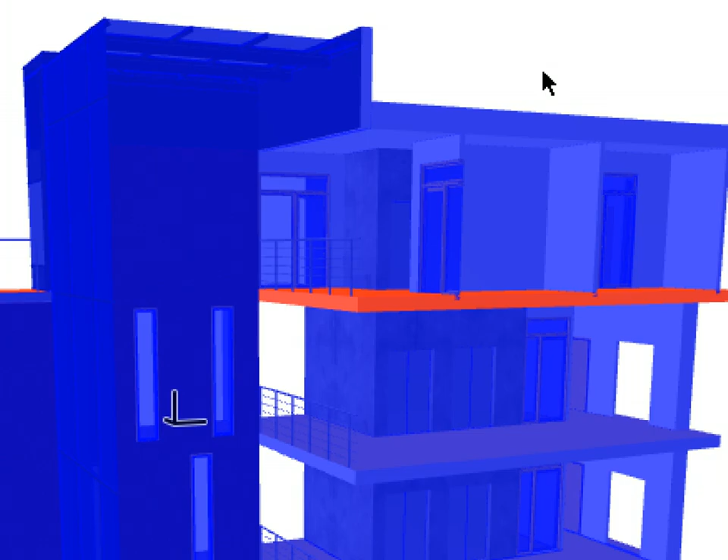Step 3. Requesting and granting elements. In this step, we will become familiar with more advanced teamwork messaging options, including element requests, as well as assigning or granting elements to other team members.

We will also see how these smart messages can help your everyday design work by automatically focusing on the element in question. In this step, the design team will be creating and modifying slab edges and working on the galleries and suspended ceilings of the office building.

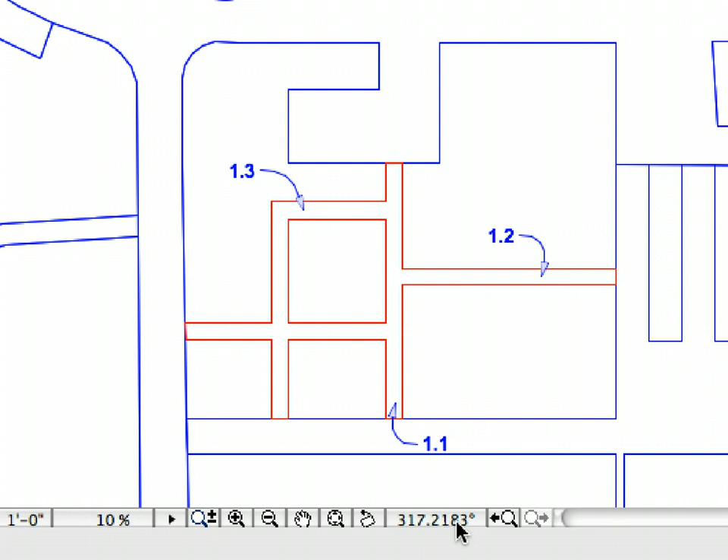Switch to the ArchiCAD instance of Mary Jones. Click the Reset Orientation button to reset the orientation of the floor plan view. Double-click to activate the 4.3.1 Requesting Slabs preset view in the Chapter 4 folder of the Navigator view map. The 3D window will open.

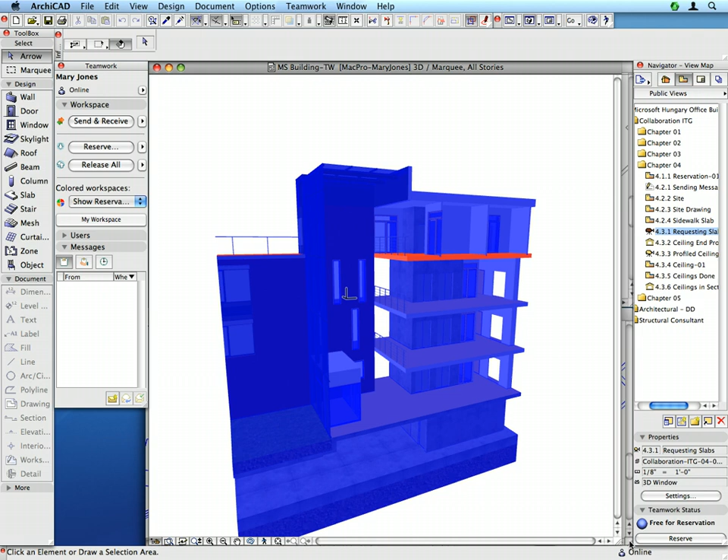The 3D window also shows reservations by other team members. You can see that the slab above the third floor is currently reserved by Joe Smith. Switch to the All with Original Color option in the Colored Workspaces field of the Teamwork palette.

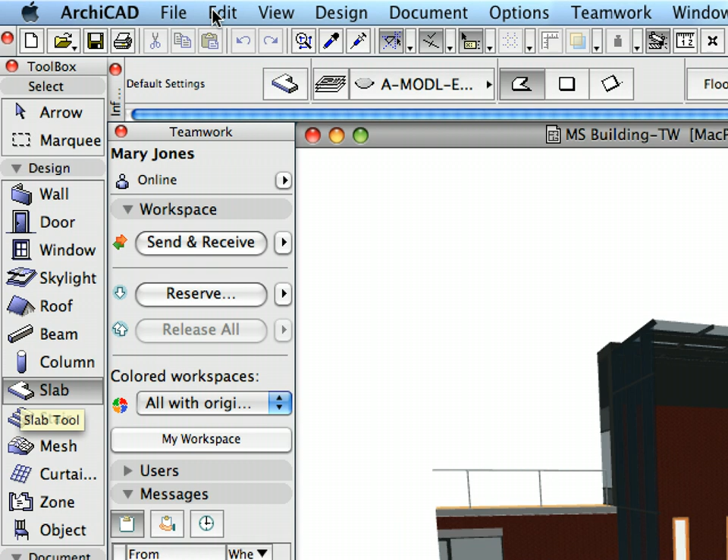Click to activate the Slab tool in the toolbox. Select Edit, Select All Slabs, to select all the slabs in the project. Click the Reserve button on the Teamwork palette to reserve the selected slabs. The Last Reservation Results dialog appears.

Here you can see that the BIM server could not reserve all requested elements. The Reserved column displays the number of successfully reserved elements. The Conflict with Others column displays the number of elements that could not be reserved because they are already reserved by someone else. As you can see, there was one element that could not be reserved due to conflict.

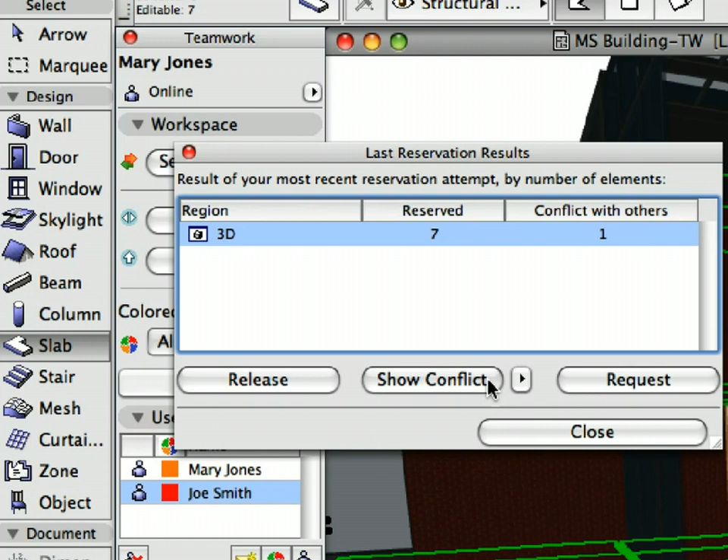Highlight the 3D region row. Notice the Show Conflict and Request buttons are enabled when conflicting elements are found. Click the Show Conflict button. This will take you to the 3D view of the whole model, where the conflicting element has been selected for you. This is the element we could not reserve because it is already reserved by Joe Smith.

Click the Request button in the Last Reservation Results dialog. The Ownership Request dialog is displayed. Here we can write an instant message to the owner of the element or elements. Notice that ArchiCAD automatically fills out the To field and inserts a default message text which you can freely change if you wish. You can also set the message priority as we discussed earlier. Click the Request button to send the request message to Joe Smith.

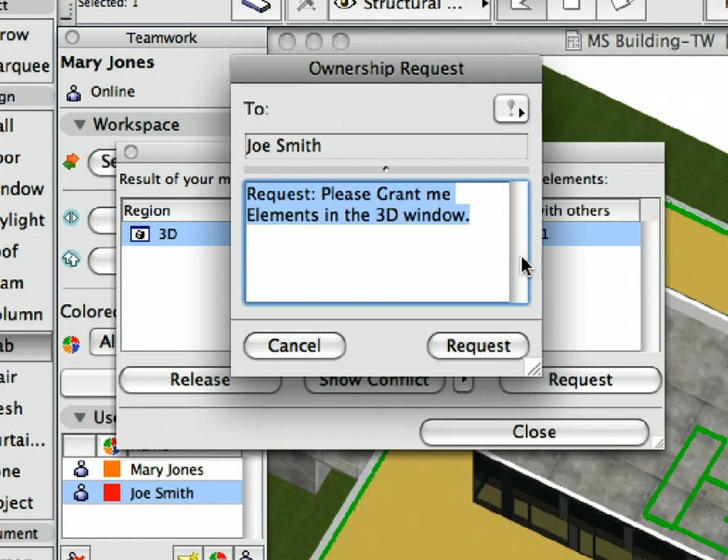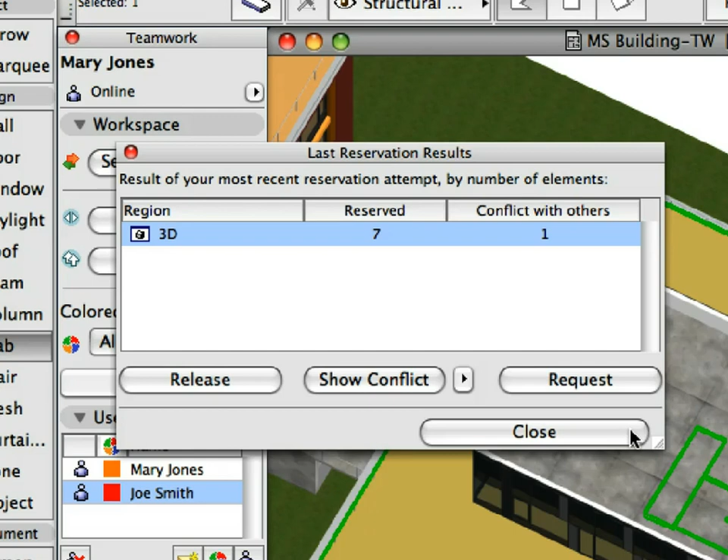It is important to know that ArchiCAD automatically associates such request messages with the requested element or elements, so the other team member can easily view the requested elements on the floor plan or in 3D, and even release these with a simple click. Click Close to leave this dialog.

Switch to the ArchiCAD instance of Joe Smith. Switch to the To Do category and double-click to open the message that has just been received to view its content. The Ownership Request dialog opens. Here you can not only read the message, but also perform various follow-up actions with just the click of a mouse. Let's review the possibilities.

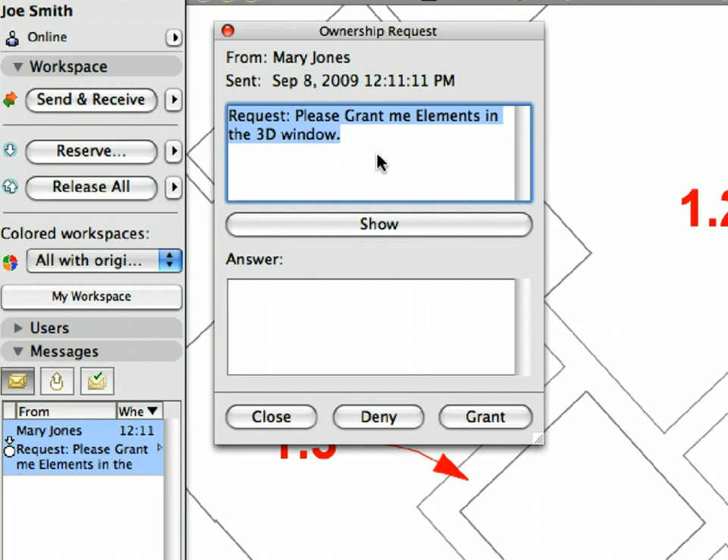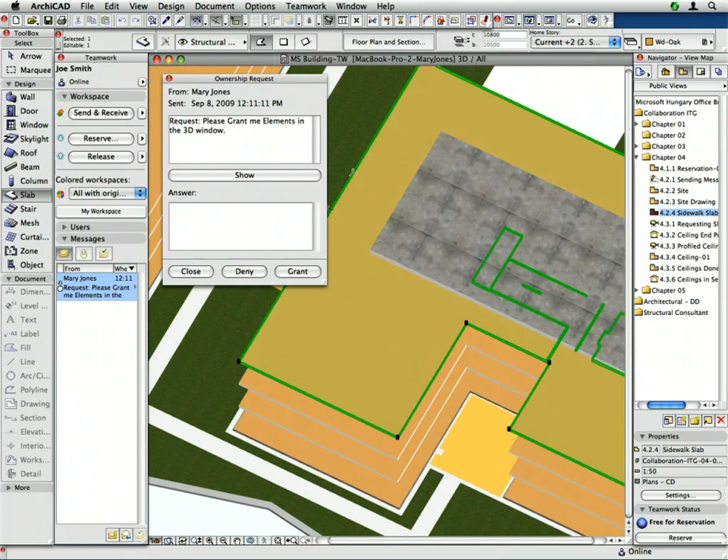Click the Show button in this dialog to display the requested element. The 3D view opens with the requested slab automatically selected. Now we can easily make a decision whether to grant or deny the requested element, or close the dialog if we want to handle this request later. Click the Grant button.

The element is granted to Mary Jones. The hotspots of the slab immediately show that it no longer belongs to Joe Smith. A grant message is also sent to Mary Jones automatically. Once we grant or deny an ownership request, its message will be automatically moved to the completed folder.

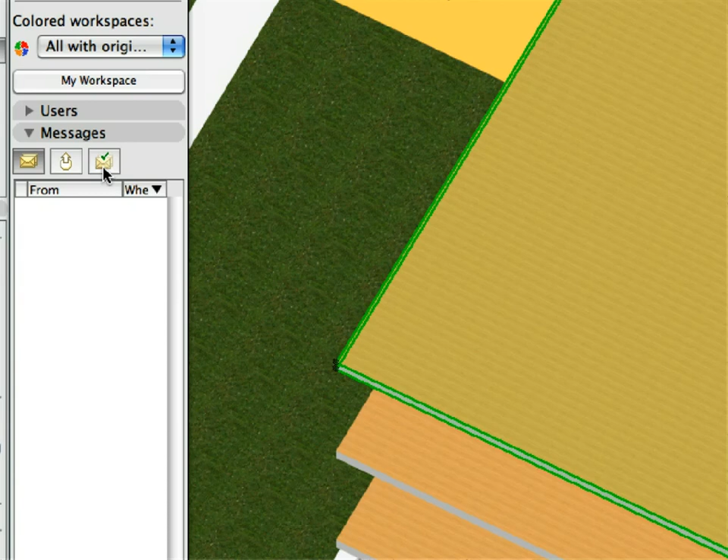Switch to the ArchiCAD instance of Mary Jones. Check the To Do category of the Messages panel of the Teamwork palette. The new message shows that Joe Smith granted the requested slab. It is also visible that the selection hotspots of the selected slab have changed. It's already in Mary's workspace. Double-click the received message to open it. The Ownership Request dialog displays a status report on the request operation.

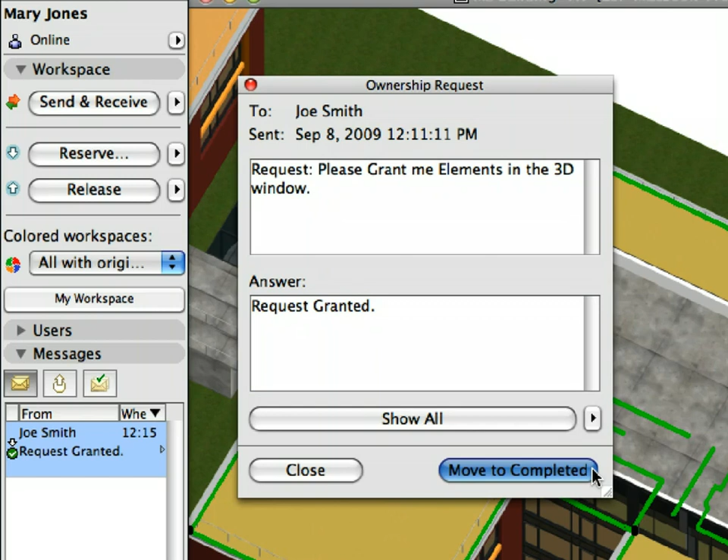The answer field shows whether the element was granted or denied by the other user. Click the Move to Completed button to move this message to the completed folder. Now the slab belongs to Mary Jones, and she can continue her work. Let's proceed and create some suspended ceilings.

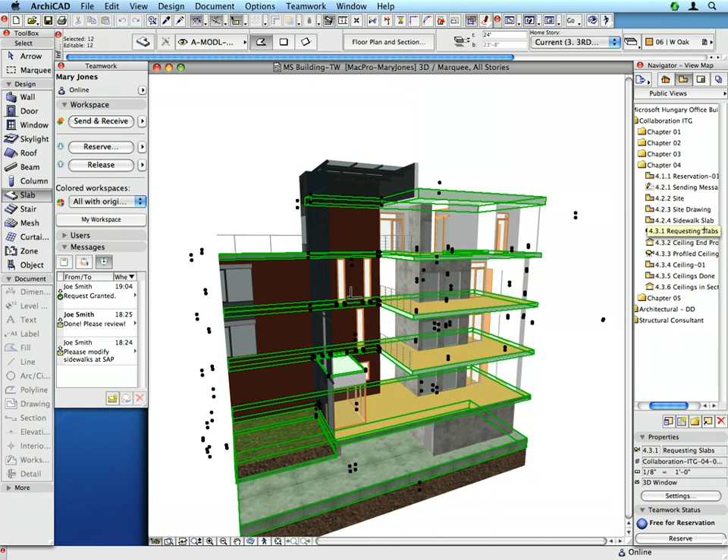Double-click to activate the 4.3.1 Requesting Slabs preset view in the Chapter 4 folder of the Navigator view map. Use the Escape key to deselect any selected elements. Click the slab above the first floor to select it. Click to activate the Slab tool in the toolbox, and click the slab edge located near its top surface below the railing.

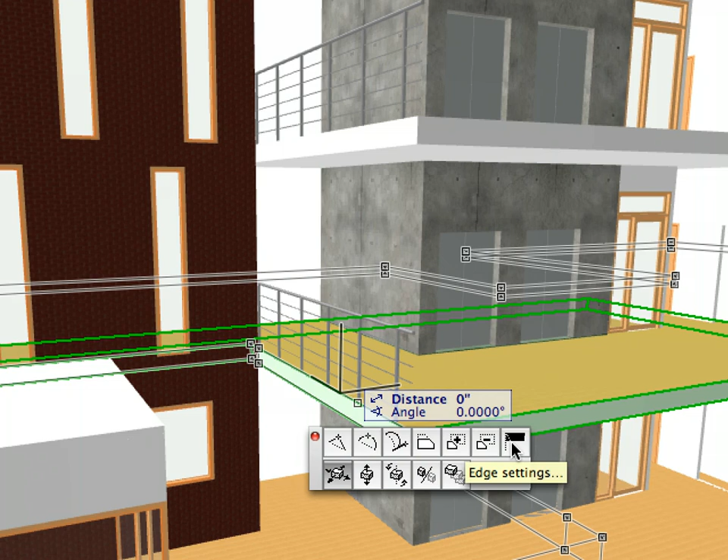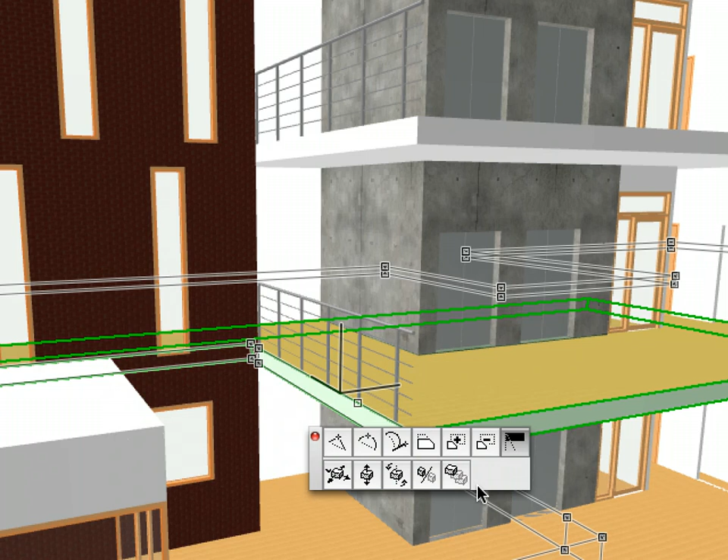Select the Edge Settings command from the appearing PET palette. At the Slab Edge dialog, you can set custom angles for the edge of the slab. In the Edge Angle field, select the Custom Angle option. Enter 105 degrees for its value. Click OK to accept these changes. Set the same slab edges of the other two slabs above the second and third floors.

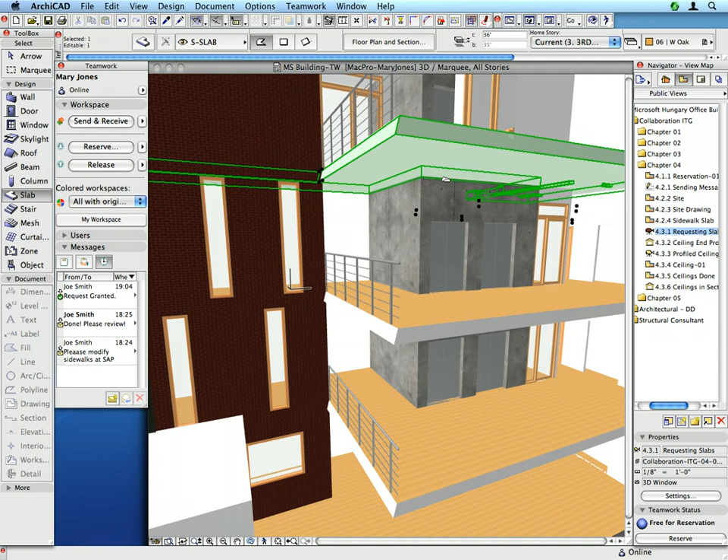Double-click to activate the 4.3.2 Ceiling End Profile preset view in the Chapter 4 folder of the Navigator view map. Here we can see the section of the slab. The slab edge is not slanted. There is also a fill showing the planned profile of the ceiling edge, which will cover this edge of the slab.

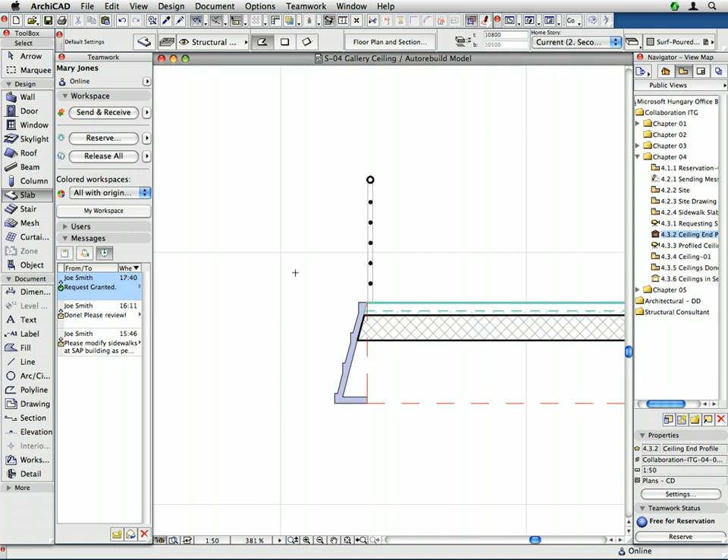Now we will assign this element to Joe Smith in the name of Mary Jones. We will also send him a message asking him to create these ceiling elements. In addition, we will send him instructions on how to create the necessary 2 feet by 2 feet ceiling grid. We can only assign our own reserved elements to other team members, so right-click the fill and select the Reserve Elements command from the context menu to reserve it.

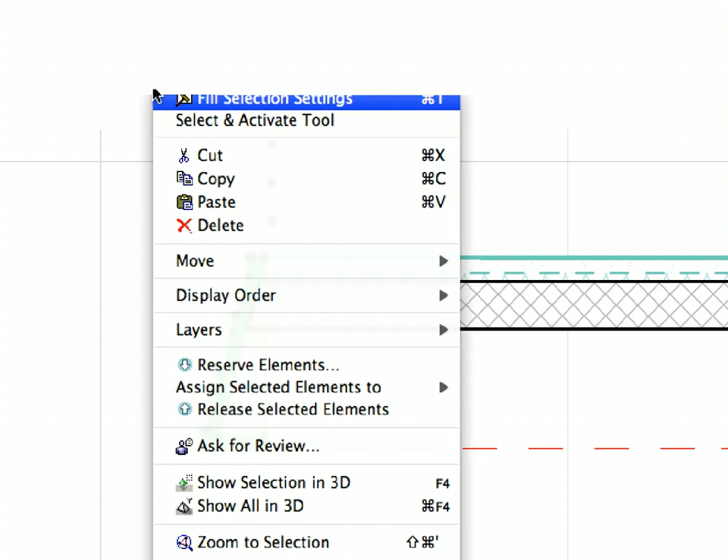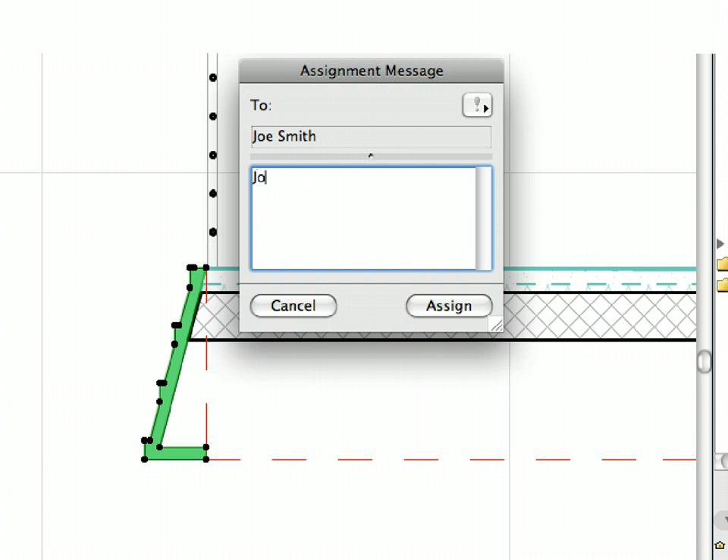With the fills still selected, right-click and select the Assign Selected Elements to menu item, and select Joe Smith from the list. The Assignment Message dialog opens. Select the default message and delete it. Then type, "Joe, please create beam profile from this fill, and then use these profiled beams to provide a closing structure for the edges of the suspended ceiling.

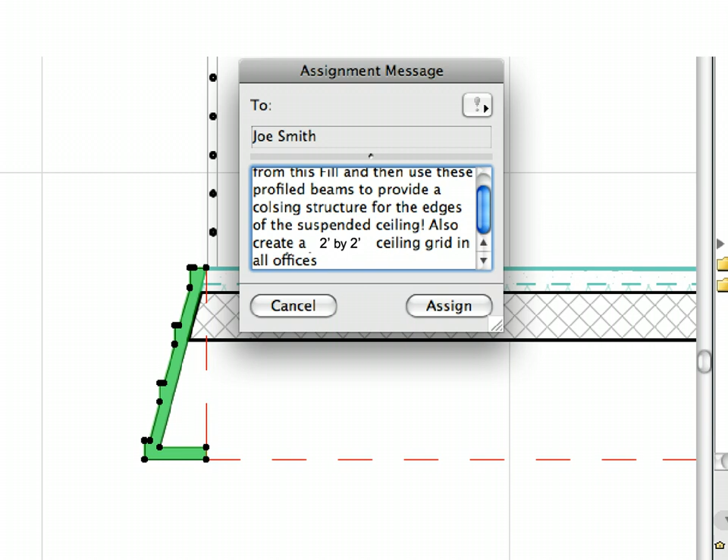Also, please create a 2 feet by 2 feet ceiling grid in all offices and passages in the project." Finally, click the Assign button to send the message to Joe. Let's switch to the ArchiCAD instance of Joe Smith. Switch to the To-Do list of the Messages panel of the Teamwork palette. Position the mouse over the new message and read the message text and the appearing info tag.

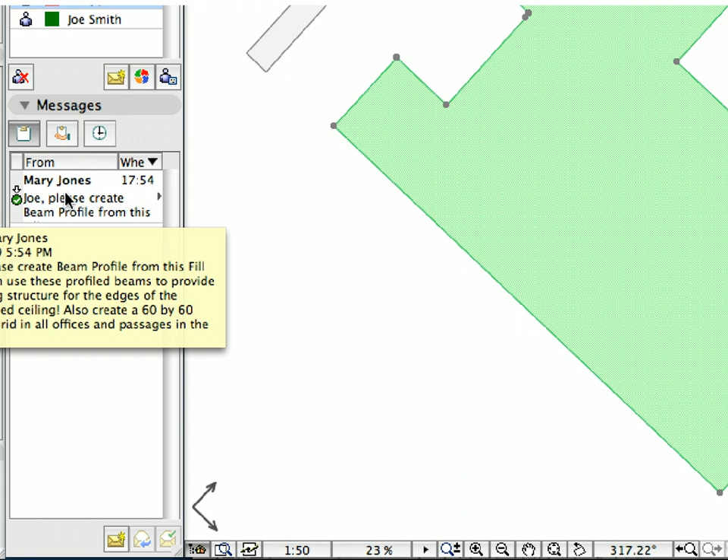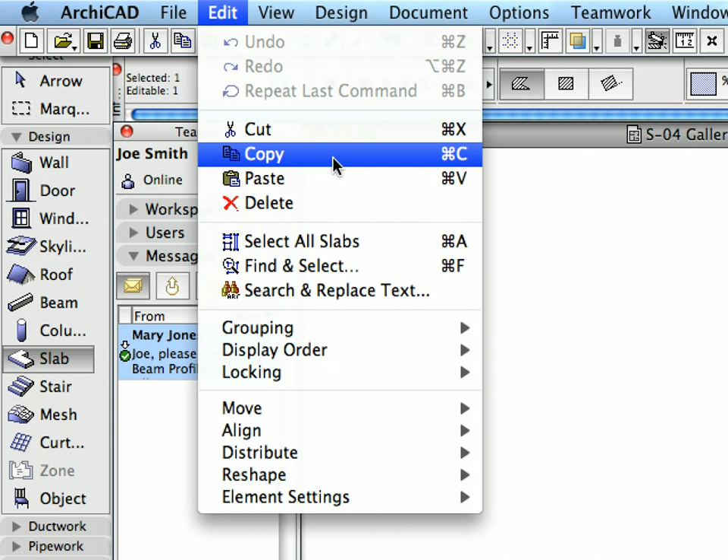Right-click the message. Select the Show Elements option from the context menu. ArchiCAD will open the section view and also select the fill which was assigned to Joe by Mary. Select the Edit, Copy menu command to copy the fill to the clipboard. Then activate the Design, Complex Profiles, Profile Manager to open the Profile Manager dialog. Click the Edit Chosen Profile button to activate the Profile Editor window.

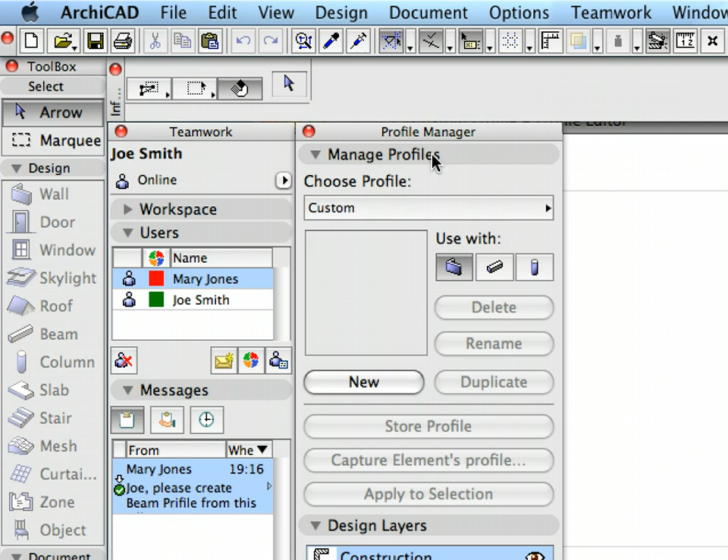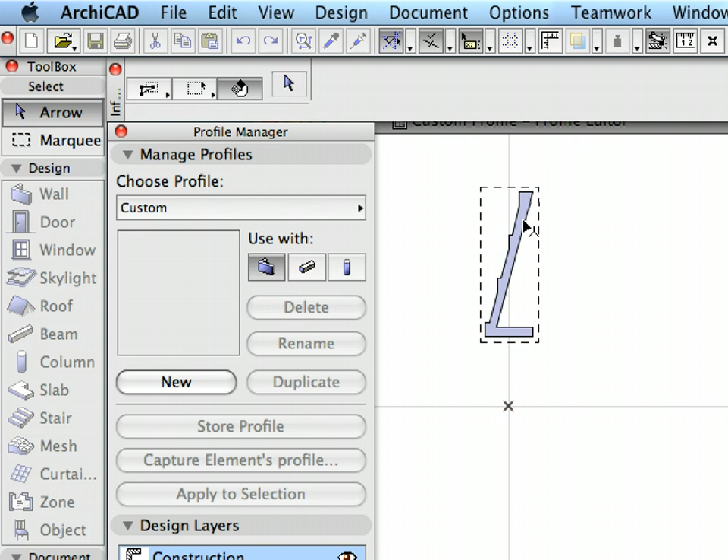Select the Edit, Paste menu command to paste the previously copied fills. In the Paste Options dialog, select the center of the current view, as well as keep the current view radio buttons, and finally click Paste to proceed. Drag the pasted fill so that the upper right node of the fill is positioned at the origin of the Profile Editor window. Finally, click elsewhere to complete the paste operation.

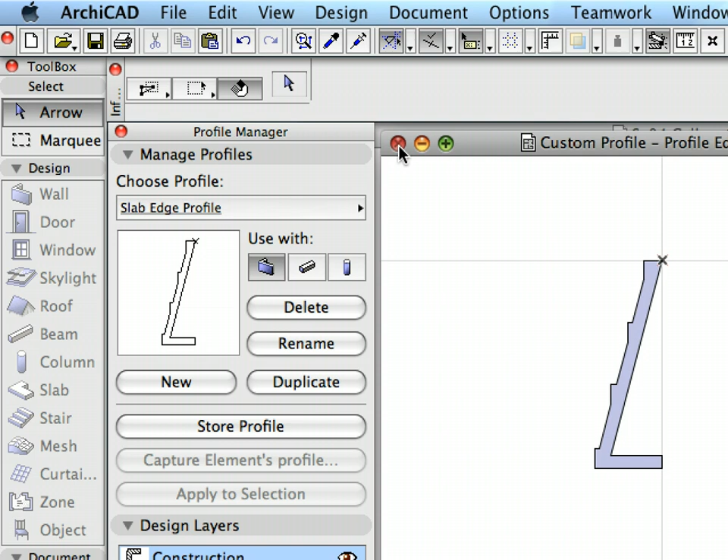Click the Store Profile button. Enter Slab Edge Profile for the name of the new profile. Then click OK to store it. Close the Profile Editor window. Close the Profile Manager palette. Double-click to activate the 4.3.3 Profiled Ceiling Edges preset view in the Chapter 4 folder of the Navigator view map.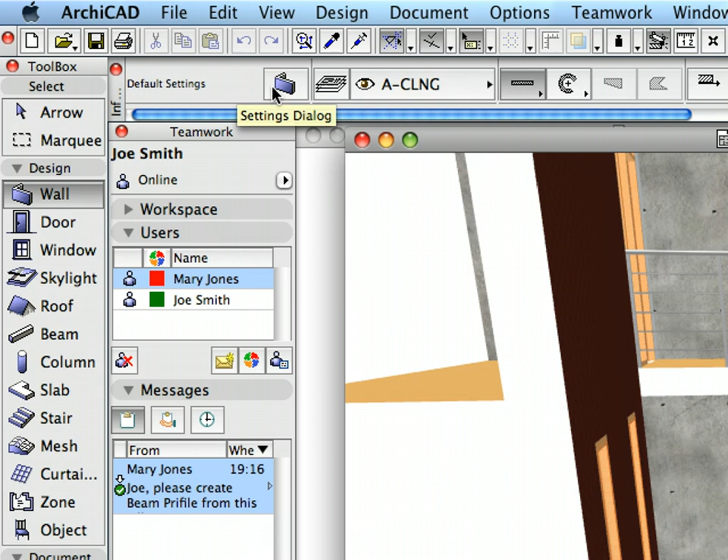Click to activate the Wall tool in the toolbox. Click the Wall Settings button in the info box to open the Wall Default Settings dialog. Click the Favorites button to open the Apply Favorites dialog. Select the Slab Edge Profile favorite from the list and click OK to load its settings. Click OK to proceed.

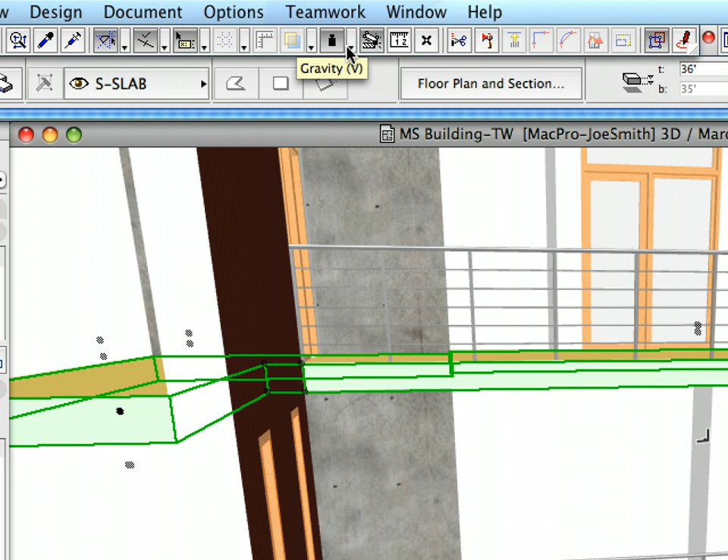Select one of the slabs in the 3D window. Activate the Gravity toggle and the Gravitate to Slab feature on the standard toolbar. Click elsewhere to deselect the slab. We will use the two endpoints of the slanted slab edges to apply the previously created profiles for the closing edge of the suspended ceilings.

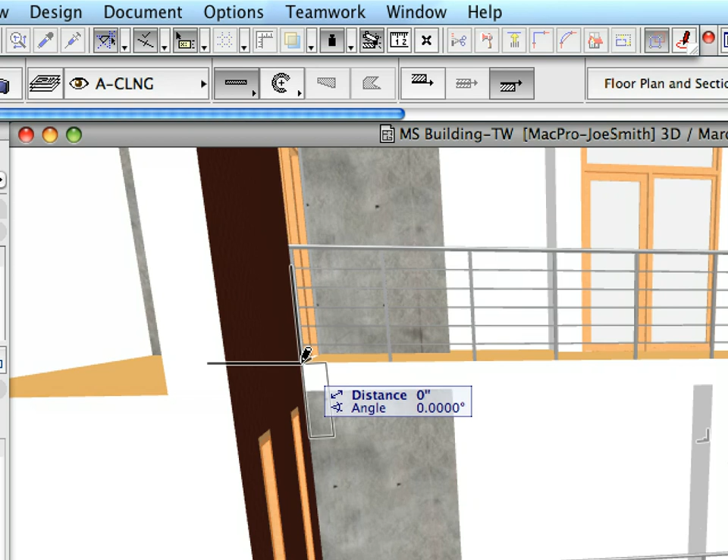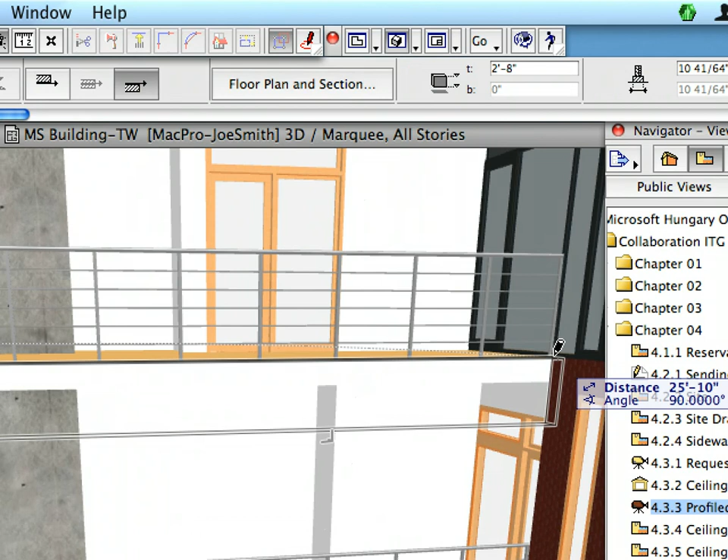With the Gravity feature activated, click the left end of the slanted slab edge above the third floor to define the start point of the ceiling closing profile. Move to the other end of the slanted slab edge. Keep the Shift key pressed to make sure it will be at a 90-degree angle, and click the right endpoint of the slanted slab edge. The tracker palette should display 25 feet 10 inches for the distance and 90 degrees for the angle. I've placed the ceiling edge profile at the first slab edge.

With the help of the Gravity feature, place two additional ceiling closing profiles at the other two slab edges above the first floor as well as the second floor. We need to modify the home stories of the two upper ceiling closing profiles since their home story is set to first floor at the moment. This means that these profiles are visible on the first floor only.

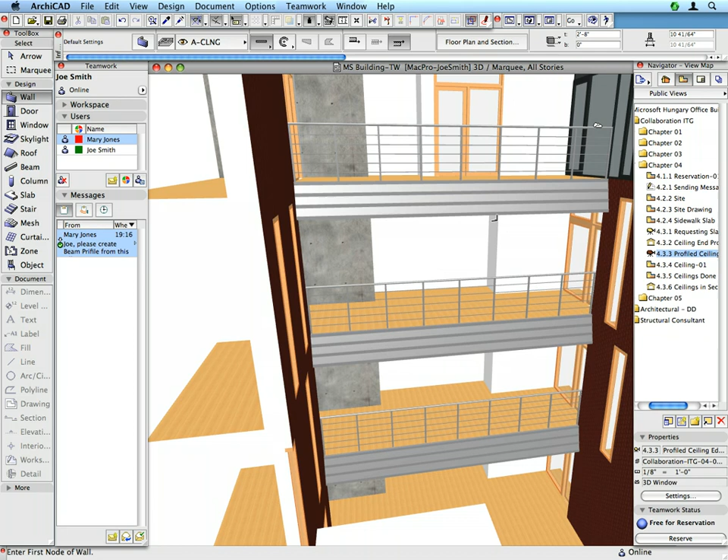Select the uppermost of the three profiles. Look for the Home Story field in the info box. You can use your mouse's scroll wheel to find this field, or you can also resize the info box so its settings are positioned in two rows. Click the Home Story field and choose the Select Story option from the list. At the Select Story dialog, select the third for the home story for the profile, and click OK to proceed. Finally, select the middle one of the three profiles. Set the home story of this profile to second floor.

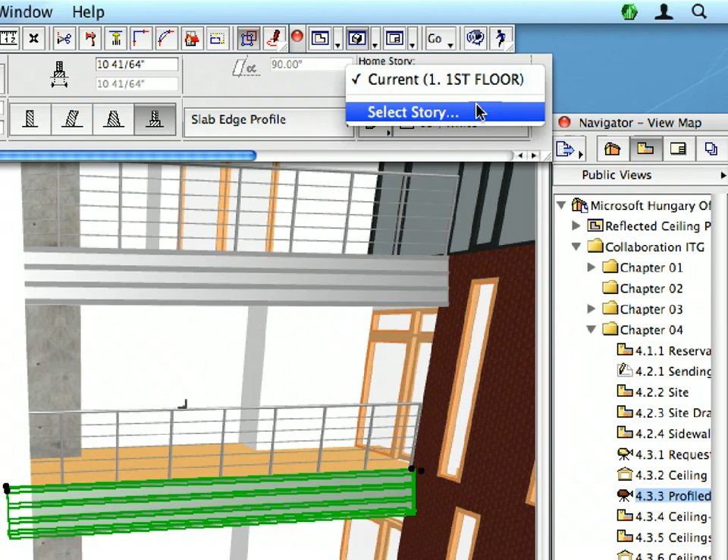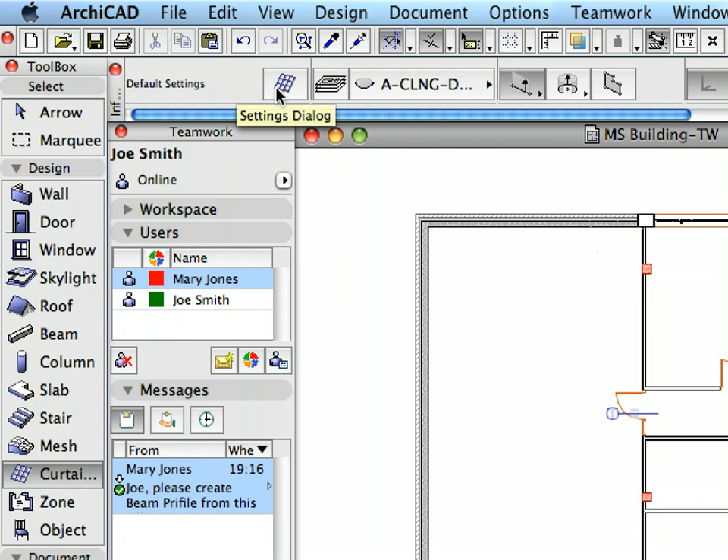Now we will create the suspended ceiling structure with the help of ArchiCAD's advanced curtain wall tool. Double-click to activate the 4.3.4 Ceiling 1 preset view located in the Chapter 4 folder of the Navigator view map. Click to activate the Curtain Wall tool in the toolbox. Click the Curtain Wall Settings icon at the info box to open its settings dialog. Click the Curtain Wall Favorites button. Select the Ceiling 1 favorite from the list, and click Apply to load its settings. Click OK to proceed.

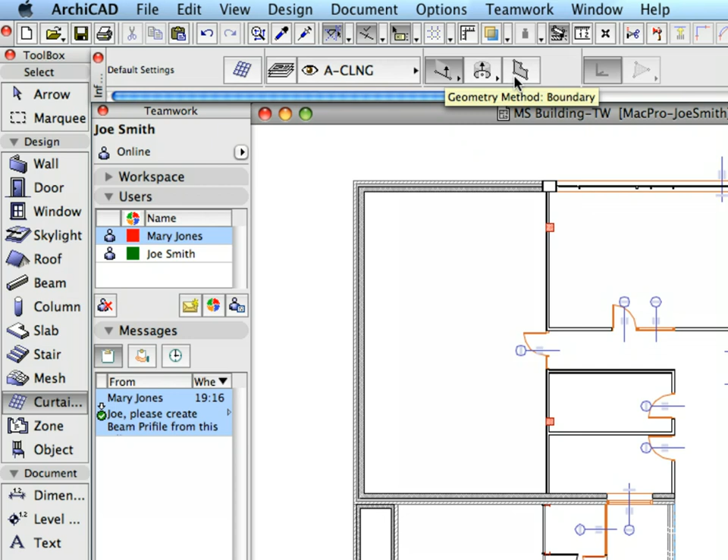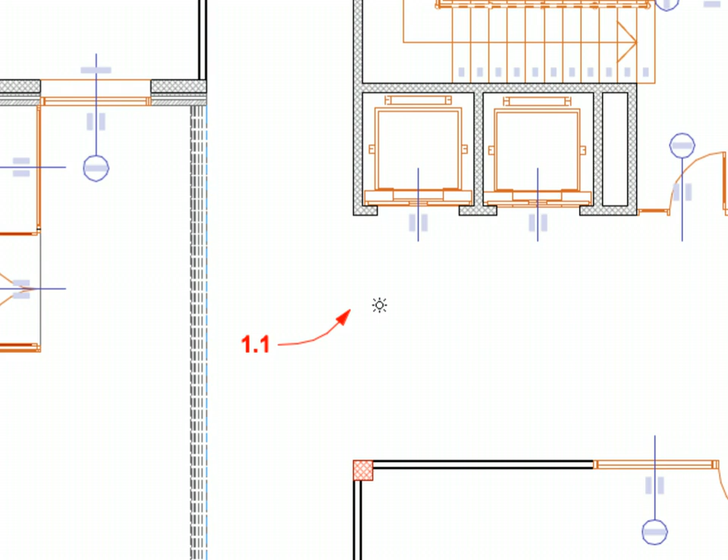Select the Boundary Geometry method in the info box. Hold down the Space key and click near label 1.1 to place the suspended ceiling structure on the floor plan. When the cursor shape changes to Sun, click inside the found boundary to define the orientation of the ceiling. ArchiCAD will find the boundaries, defined by surrounding walls and slab edges, and generate the ceiling structure considering these boundaries. The applied curtain wall favorite refers to a 2 feet by 2 feet suspended ceiling grid. As you can see, ArchiCAD's curtain wall tool can be perfectly applied to represent not only curtain walls, but also suspended ceilings, which also consist of a grid-like structure.

With the curtain wall tool still active, shift-click the previously placed suspended ceiling to select it. In the info box, modify its base height to 9 feet 5 inches. The base height is indicated with the letter B. The height of the suspended ceiling is now adjusted to its correct height. Notice that its floor plan representation is now displayed by dashed lines. We will not create all the suspended ceiling grids now. The grids have already been created in this training project file to save time. Let's see what the completed ceiling grid looks like.

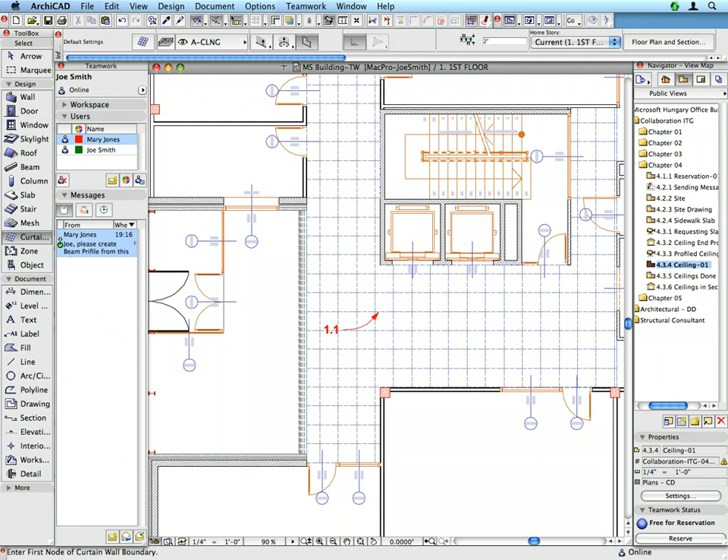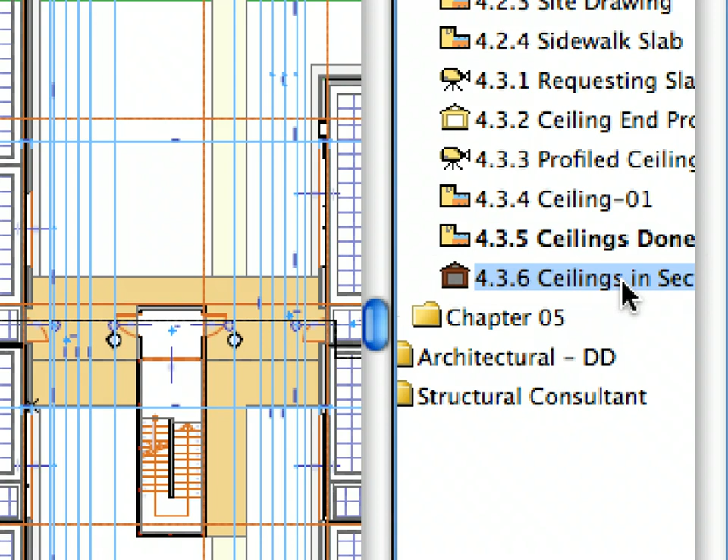Double-click to activate the 4.3.5 Ceilings Done preset view in the Chapter 4 folder of the Navigator view map. In this view, all ceilings have already been completed on the floor plan. Activate the 4.3.6 Ceilings in Section preset view now to display the ceilings in a section view. The live section view is automatically updated as the project changes. As you can see, all suspended ceilings are placed correctly.